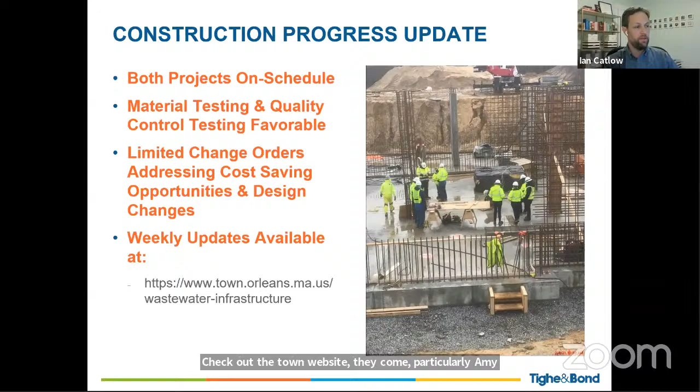One more update to add to the list that Lynn presented at the outset of the meeting: if you want to learn anything about the project, or why it's taken you longer to get to Friends Market or somewhere else in town, check out the town website. AECOM, particularly Amy, has been doing a fantastic job keeping that updated with traffic information and where work is ongoing.

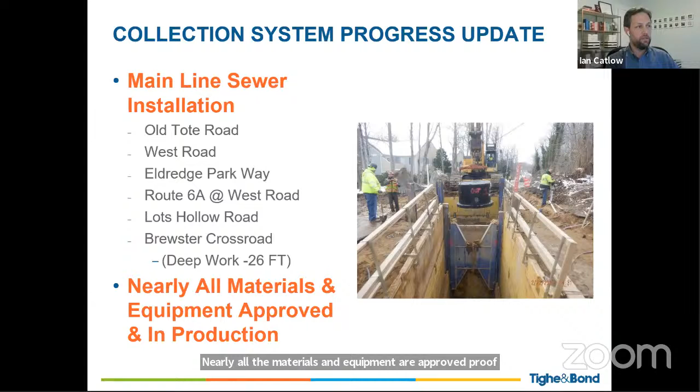Briefly, in terms of collection system progress, mainline sewer installation is complete on Old Tote, West Road, and Eldredge Park. A fair amount of work is done on 6A at this point, Lots Hollow, and Brewster Cross Road. In fact, Brewster Cross Road is the deepest sewer on the project, just about 26 feet below grade. So we're making good progress on some of the harder parts of the collection system project. Nearly all the materials and equipment are approved at this point and in production, and things are going really smoothly there.

Flipping over to the wastewater treatment facility site, the gentlemen in the figure here are wrapping up some floor finishing work in the lower level of the treatment facility. You can get a sense by looking at these guys and the height of the walls and columns set in place just how big the facility is. It's coming along quite well at this point. The base slab is complete, and all the foundation walls and columns are in progress. In the next few weeks, Daniel O'Connell and Sons is going to be preparing elevated slab portions of the concrete work, which you could imagine as a ceiling over these gentlemen working in the lower level.

There's a substantial amount of contractor proposed equipment under review through the shop drawing process. While many materials have been approved and are being manufactured, AECOM and DOC are working hard to keep feeding the construction machine, if you will, by getting additional shop drawings reviewed and approved so they can get things on order. We're trying to keep a close eye on this particular issue, as we're all concerned about potential delays in shipping and procurement of certain items.

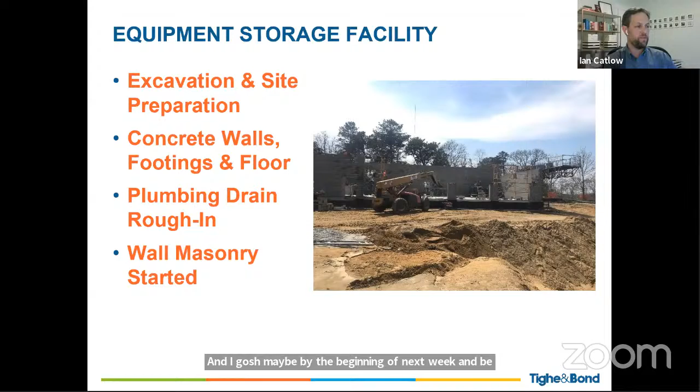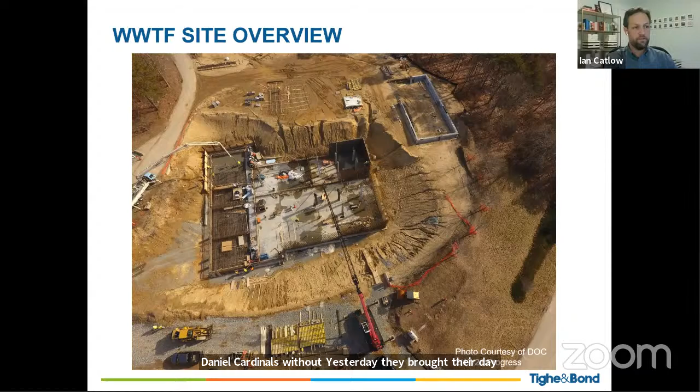They brought their drone and did another flight of the site, and this is what's happened in just over a month and a half. You can see the extent of walls that have gone up around the basement. There's some formwork here that they need to finish stripping. There are still some wall sections that need to go in, but they're moving right along. This is great progress.

Moving off the treatment plant site to the Wick well, this is the disposal location up near the water tower. The valve vault is essentially in place in terms of its base and walls. There's some piping going in and out of the vault, and the photo shows that the contractor has formed up so he can pour concrete for the roof of this structure. This isn't really on the critical path, but they've taken it on opportunistically, so when they have a spare moment they can come up and pour this concrete.

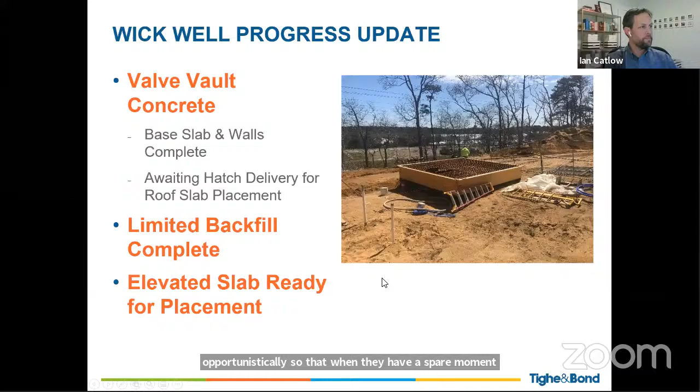Okay, so now the interesting stuff for FinCom - this is the cost update. So, two contracts. We initially started the wastewater treatment facility at $32,786,000. The cost has increased to $33,713,889. We've talked previously in other Board of Selectmen updates about why that's gone up - some of it, a lot of it, has to do with filed subbids that we added, and I'm not going to get into that now. I'm going to focus just on the two most recent change orders that I haven't discussed in prior updates.

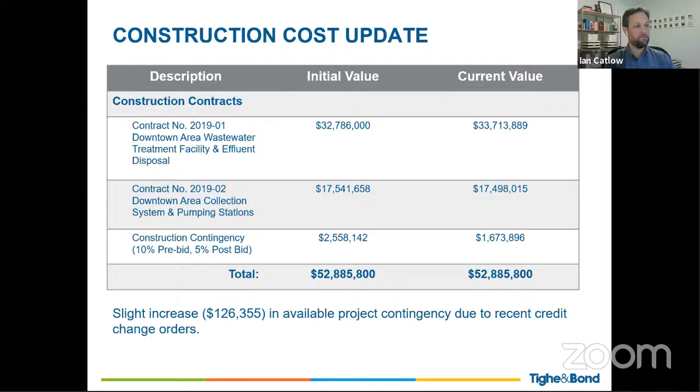Similarly, or actually differently, the collection system project started out at $17.541 million and change, and that's now down to $17,498,015. As you can see in the third line down here, we still have a fair amount of contingency - we started at 2.5 million, now we're down to just under 1.7 million. But I think we're all pretty comfortable that we can live within our means on this. There's been a slight increase in contingency since our last update to the board - we've captured about $126,000 in change, largely through a couple of value-oriented change orders.

So a little bit more on those. At the treatment plant, since our last update, we've executed change order 3. This changed the way pipes go through the walls - we switched from wall pipes, which go all the way through the wall and extend further, to wall castings, which can be installed entirely within the formwork. That saved the contractor time but yielded a similar quality product. We were able to capture a $30,000 plus change order there, so that was a credit to the contract.

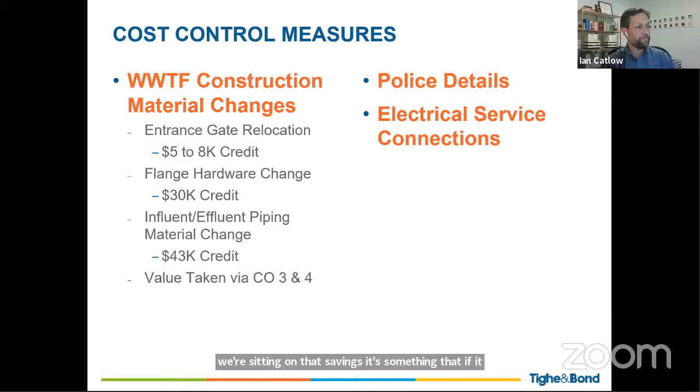And then we're almost to the end. Last slide I've got here is dealing with contract operations. I just want to get people attuned to what the schedule is primarily.

The draft RFP for this is actually no longer under review. It's out to bid as of yesterday. Bids are going to be opened on August 4th. The evaluation committee intends to review these bids by August 25th. And all of this is in anticipation of a select board warrant article vote on September 8th and a special town meeting to follow in October.

The whole point of this schedule is that it allows operators to be engaged in the last 6 months or so of construction so that they can get a good sense of equipment startup and see how the end of the building comes together, so that the people who are going to be running it know where everything is and how it works.

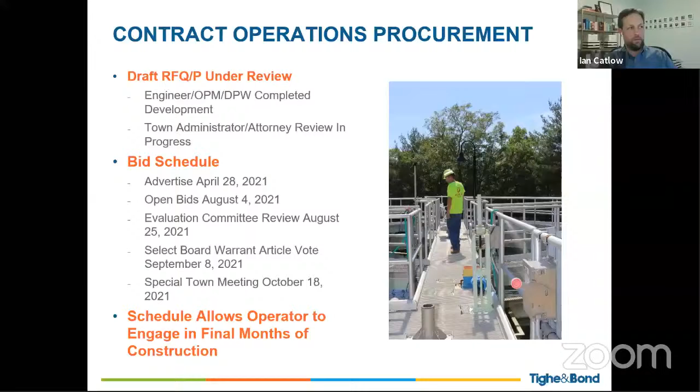So with that, any questions regarding the collection system or treatment facility that Tom or I could answer?

I think we're good, Ian. Thank you for that update. Excellent, again Tom's part might trigger more, but that was very helpful. Okay guys, thank you, see you.

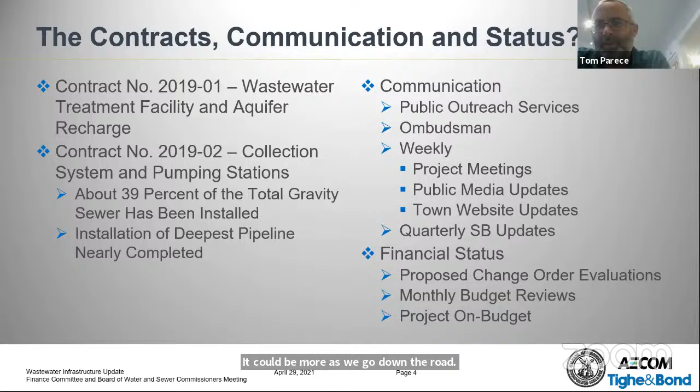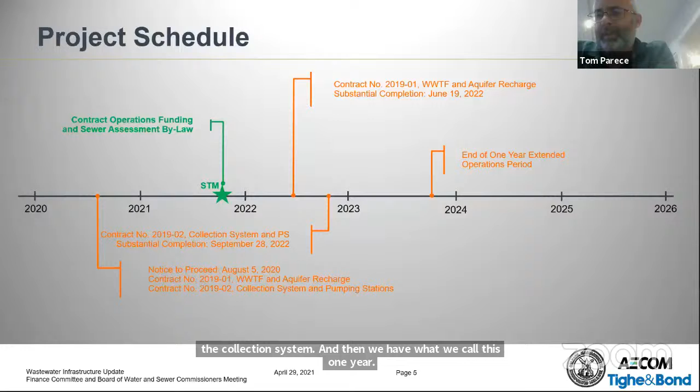Just to give everyone a quick overview of where we are with the schedule: back in August of last year is when we did the notice to proceed. The contract operations shown here in green reflect that at the special town meeting in October, funding will hopefully be approved. Somewhere around the middle of June 2022 is when the treatment facility will be substantially complete. A few months later is the substantial completion for the collection system. Then we have a one-year extended operations period where both the OPM and AECOM are available to assist the town and operators in running the facility, finishing punch list items, warranty issues, and so on.

I have a couple of slides later with combined schedules so you can see how things overlap, particularly between SRF, the downtown area, and Meeting House Pond.

Hey Tom, yes, just Lynn briefly — could you clarify when people will actually begin to use the system?

The main thing is the substantial completion of the treatment facility — that needs to be up and ready to accept wastewater. The collection system is in what I'll call 3 tributary or collection areas, one for each pumping station. Pump Station 1's tributary area covers Old Colony, West Street, Potonumecot, Route 6A, etc., and all flows to a pumping station at the intersection of West and Old Colony.

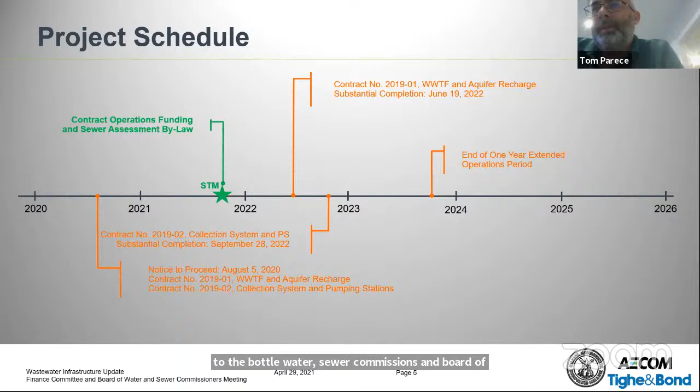So all that pipeline is substantially complete right now. They've been doing some testing and videoing of it. We anticipate that once the treatment plant is substantially complete, we can start to issue permits through the Board of Water and Sewer Commissioners and Board of Health for abutting properties to begin tying in — including some of the downtown area.

The project was scheduled to do tributary area 1 first, followed by 2, then 3. Area 2 includes the Snow Library Pump Station and the rest of the downtown businesses, which would likely follow around the spring of 2023. Ultimately Pump Station 3, at the Cranberry Plaza or Stop and Shop Plaza, would be last. We're hoping to phase it so not everyone has to hook in at the same time.

Thank you. You're welcome.

Kind of an overview: on the left-hand side is where the wastewater treatment facility is located, at the old Tri-Town septic treatment facility site. All the way to the right is Pump Station 3 at the Stop and Shop or Cranberry Plaza. Lower right is Pump Station 2 at Snow Library. Pump Station 1 is again at Old Colony and West. And lower left is the effluent disposal at Lots Hollow near the water tower.

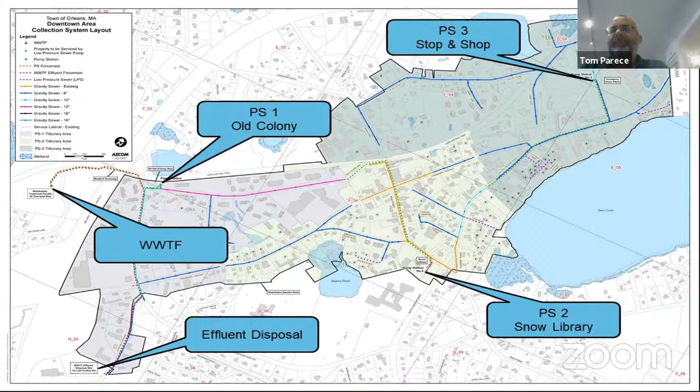I won't bore everyone with all of these, but this gives an overview of the extent of the work: some 32,000 feet of gravity sewer, 11,000 feet of force main, and a couple thousand feet of low pressure main. The piping going under Route 6 will likely occur after Memorial Day this year — we're in the midst of working out those details with the town and MassDOT, possibly after Columbus Day as well.

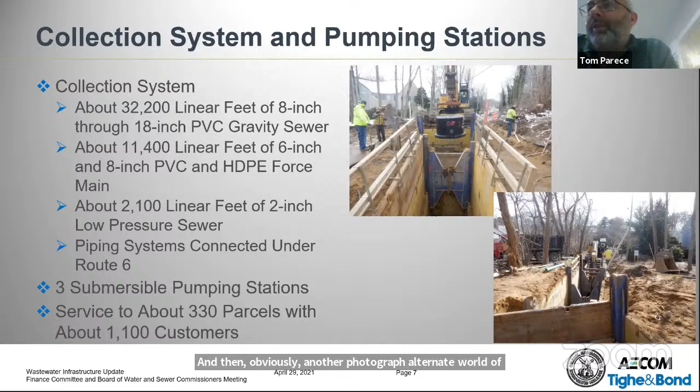Again, 3 pumping stations as we talked about, and some 330 parcels and 1,100 customers. And as Ian said, this similar photograph on the upper left is of Brewster Crossroads — yes, that is the deepest manhole installed, though there are actually some pipes a little deeper that were installed at West Street. Another photograph of Old Tote Road shows how extensive this ongoing work is.

So with that, I'll stop in case there's any other questions relative to the wastewater treatment facility.

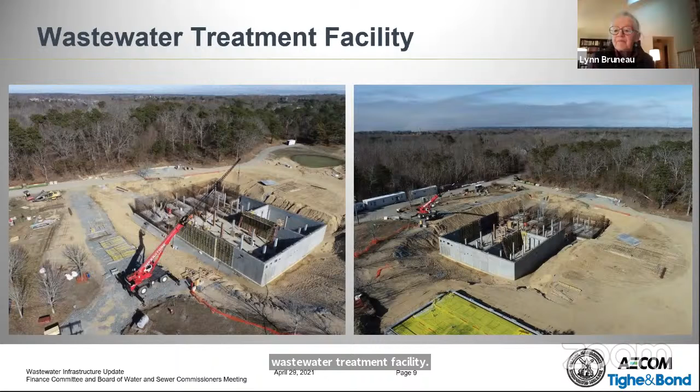I think we're good. Okay, great. So let's talk about Meeting House Pond and where things stand, giving an overview of the area.

We have a single pumping station for this area. Keep in mind that anyone on low pressure sewer will have their individual pumping units to pump up into that gravity system, but the pumping station is targeted to be on town hall property.

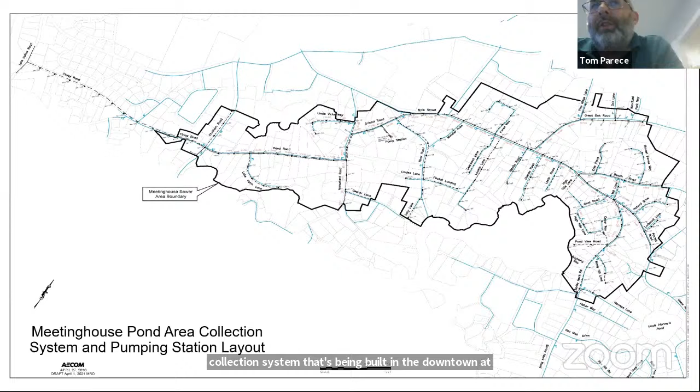We're working with the Conservation Commission to identify the final location based on a discussion we've had with the DPW about two weeks ago. That flow will then pump from the school to the pond over to Finley and ultimately discharge up into the collection system being built for the downtown at the intersection of Lots Hollow Road, then flow to the treatment plant from there.

Again, similar components as the downtown: 16,000 feet of gravity, 20,000 to 21,000 feet of low pressure, that single pumping station, 7,500 feet of force main, about 474 users. As I said, about half of them are going to end up on the low pressure systems.

We'll get into a little bit more detail on the next couple of slides on where we stand and how we're trying to minimize the number of low pressure pumps if possible.

We're currently in what we call the preliminary design phase, which consists of various components. One is topographic survey to look at the elevations, done through a combination of aerial survey, which has occurred, and then ground survey to pick up utility information, sills, and other items you can't get from aerial survey.

We're in the midst of the tail end of most of the subsurface borings. People have probably noticed a couple things out there—these very large white circles in place with numbers. We do those in white paint to identify where those soil borings are going.

Then DigSafe is called, and they come out and mark utility locations, whether it's gas, electric, et cetera, or the water department marks out the water lines. So it's kind of a two-phase process: we vacuum excavate the first 5 feet, and then drill down the rest of the way.

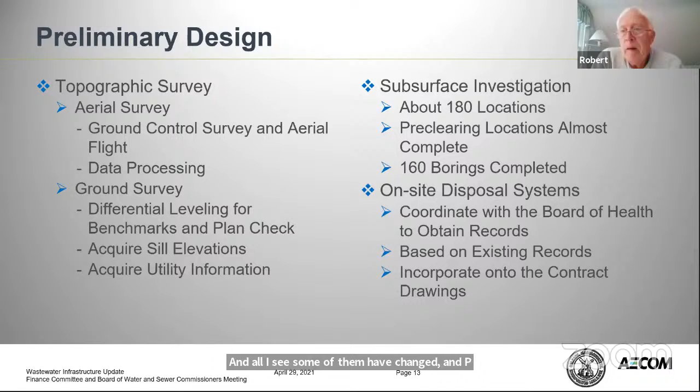Some of those locations changed, and people went out and got engineering firms to look at their locations to confirm it's the best option, particularly for some of the larger businesses or condo associations. There aren't as many of those in the Meeting House Pond area, but we're going to follow that same process.

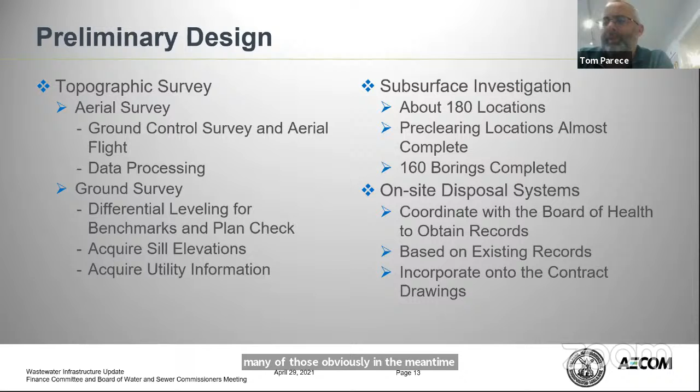The last couple of things relative to the preliminary design is what we call the cultural resource evaluation, similar to what we did for the downtown. For the most part it's paper research and a field survey, done in accordance with federal and Massachusetts historic rules and regulations. The intent is to identify any potentially sensitive areas of historical value that need to be protected. Similar to the downtown area, there were some areas with a high likelihood of sensitive areas, so we have a firm called PAL, the Public Archaeology Laboratory out of Rhode Island.

When we're in some of these areas, we have an archaeological specialist standing by during excavations to make sure that if we uncover something, they can stop the work, record it, and determine if anything else needs to happen. We did that for two days in the downtown area and haven't found anything so far, but we'll do the same thing for the Meeting House Pond area.

On the right-hand side of the slide, the last couple of items are to update the preliminary system configuration. As part of our original work four or five years ago, we did some preliminary plans and profiles to identify how much would be low pressure versus gravity, and how we identify that hybrid system versus other technologies. We'll take this information to update those and the quantities associated with it. The intent is, if survey shows that a roadway could be gravity versus low pressure, to minimize the number of low pressure pumping systems.

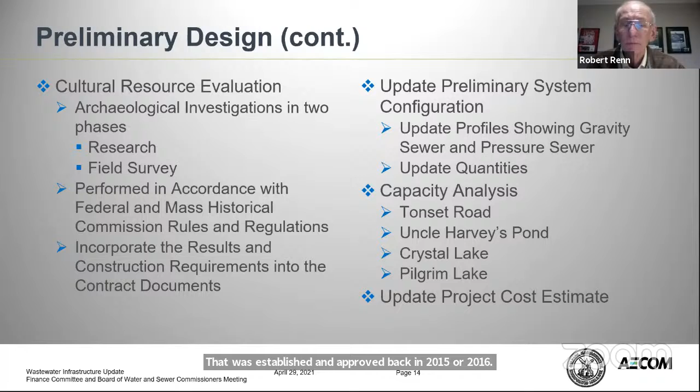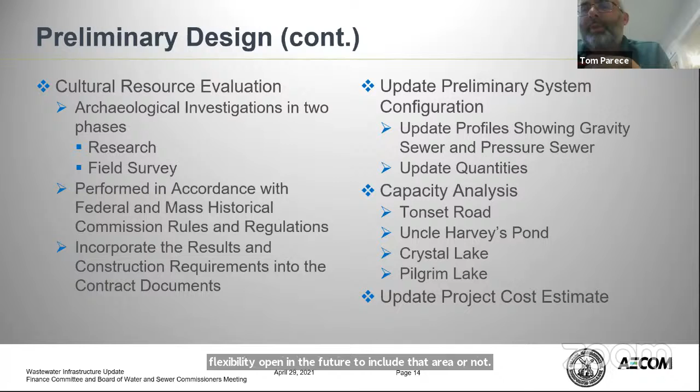That's correct. Yes, this will be able to tell us - if one of these locations comes into the system, we'll be able to give you an order of magnitude to say it's going to increase the cost of the project by X dollars. And the town will have to make that decision to say, yep, we want to go forward with that because we want to keep the flexibility open in the future to include that area or not. But that will have to be a decision made at some point by the town. Thank you. You're welcome, Bob.

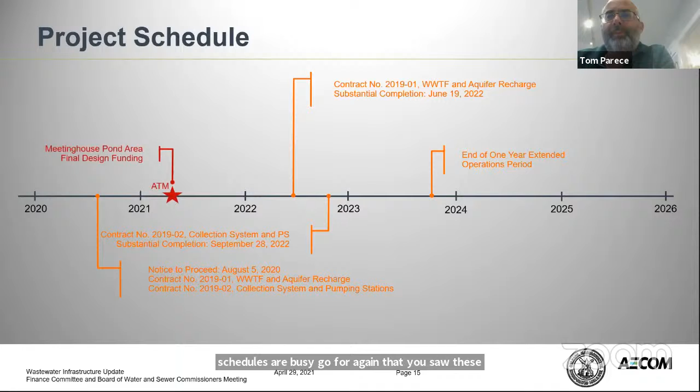And then, as I mentioned, there's a couple of other schedules as we go forward. Again, you saw these similar orange ones for the downtown area, but I'll flip through some of the Meeting House Pond ones. So at this annual town meeting, May 22nd, is for the final design funding. There's a slide later on to give you more detail on that.

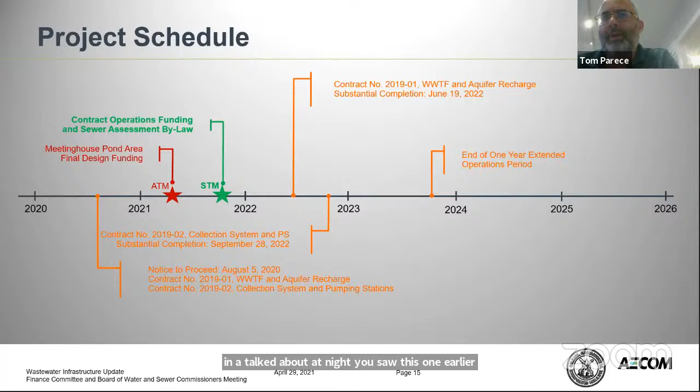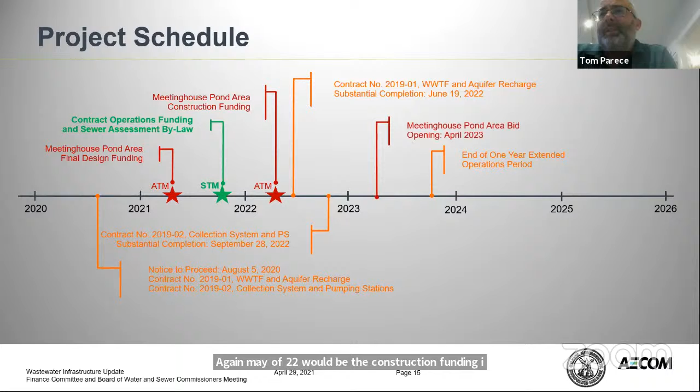Ian had talked about it, and you saw this one earlier. Again, the contract operations funding would be at the special town meeting in about the middle of October. May of '22 would be the construction funding I mentioned for the Meetinghouse Pond. And somewhere around April-ish of 2023 is when we'd be out to bid and opening bids for the Meetinghouse Pond area, with within a couple of months getting the notice to proceed. Somewhere around September-ish of 2025 is where substantial completion would hit for Meetinghouse Pond.

I'd also anticipate we'd probably phase the Meetinghouse Pond areas so we wouldn't have to wait for all of the connections, or all the pipelines, to be done in order for those connections to start to tie into it. And again, one of the last slides incorporates the SRF program and how critical that is to not miss some of those deadlines. Dick referenced that earlier in the presentation.

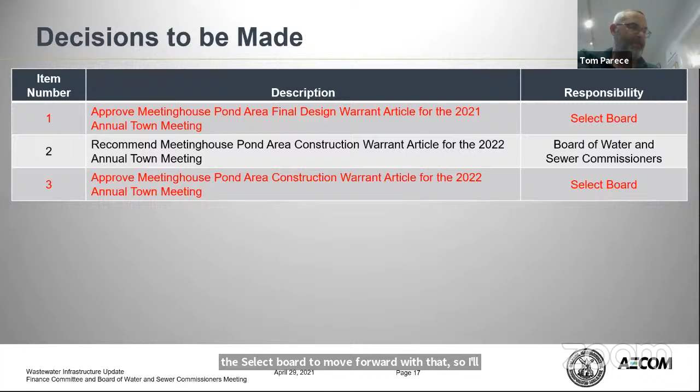So now the select board will do theirs once they get all their meetings done. Moving forward, looking a year from now, the Board of Water and Sewer Commissioners will review and approve an article for the construction funding, at $32 million plus or minus. Then ultimately it goes to the Finance Committee and the Select Board to move forward with that. I'll pause, Lynn, in case there are any other questions on Meetinghouse Pond.

I'll catch people up on permeable reactive barriers. And I couldn't get my thing unmuted in time. I do have a quick question for him.

Tom, going back to a question Bob Wren asked about the alternate areas that may be considered, is there money in that Meetinghouse design thing to consider implications of those areas, or are they strictly out in left field with nothing involved in them at all? No, there was no money at all in the articles, either the design or the construction article, for anything outside the geographic area.

Okay, one other quick question. You would be looking at what properties would be involved and what costs would be involved if you were to undergo that study, but you would also get an idea of the flows generated relative to what capacity the plant could have to absorb more capacity. I assume if those studies were decided to be done, that you would be doing that work also. That is correct. Thank you. You're welcome.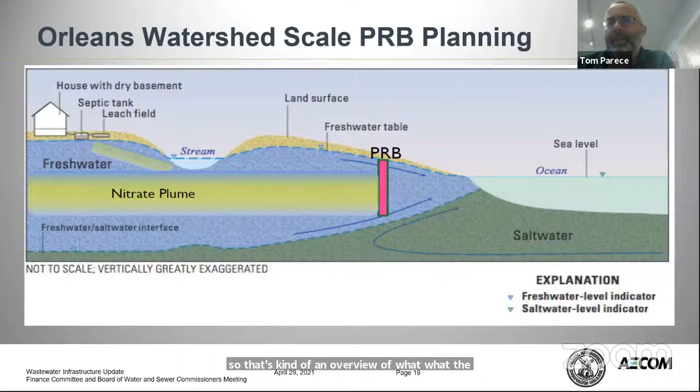Over the last couple of years, we've been doing the pilot study at Eldridge Park. We're in the last couple of sampling modes this year, although there was funding appropriated at the last special town meeting to do some additional analysis, more simplified, specifically looking to see when this emulsified oil expires, gets used up. That's a very difficult thing to identify because it will vary site by site based on groundwater flow, amount of nitrogen you're trying to take out, etc.

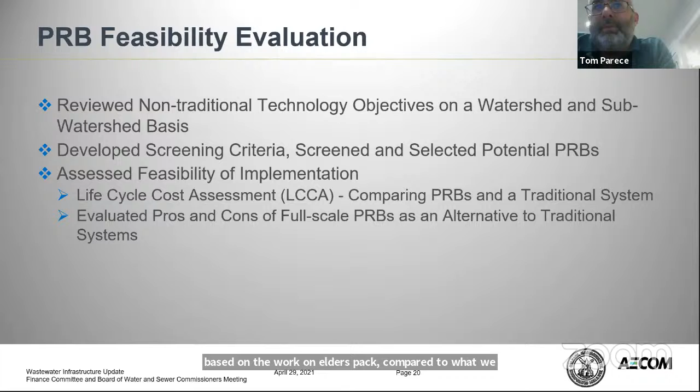But we want to get an idea of this, at least here at Eldridge Park, because it has a very high concentration of nitrate in the groundwater upstream of it, which will give us a good indication of what goes downstream and how long it will last. We reviewed all these locations on a watershed, sub-watershed basis, developed some screening criteria, did a life cycle cost assessment comparing these PRBs based on the work at Eldridge Park against what we call a traditional system—sewering, pump stations, etc.—and then looked at the pros and cons of both the non-traditional and traditional systems.

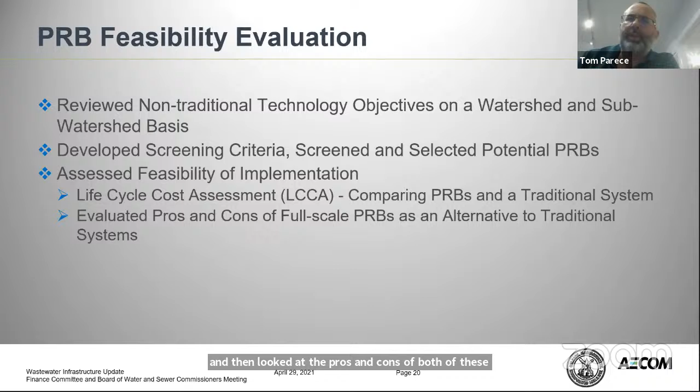We did some optimal dimensions of them, modeling the groundwater flow to define what we call the capture zone. We're like 40 feet down in the ground, about a 30-foot deep PRB. We don't catch all of the nitrogen in that whole water column, I guess I'll call it, but within that sweet spot is what we're aiming for, to remove a significant amount of it.

Again, we look at the upgradient and downgradient potential for what we call flux, the amount of nitrogen that's in there, and then we look at the efficiency of the PRBs compared to traditional ones. In this case, in Meetinghouse Pond, we're removing 100% of the nitrogen. No matter how good a PRB is, we can't guarantee you'd get 100% of the nitrogen out, and that's exactly why we're doing sewering of the Meetinghouse Pond area.

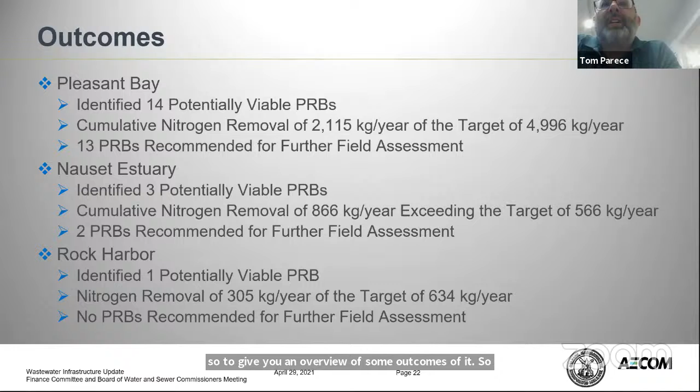So to give you an overview of some outcomes, we've broken it down by the 3 watersheds. Pleasant Bay, we identified some 14 potential viable PRBs. We show that they can remove some 2,100 kilograms of nitrogen, but that whole area has a target of some 5,000. We've recommended another 13 to go forward with assessment.

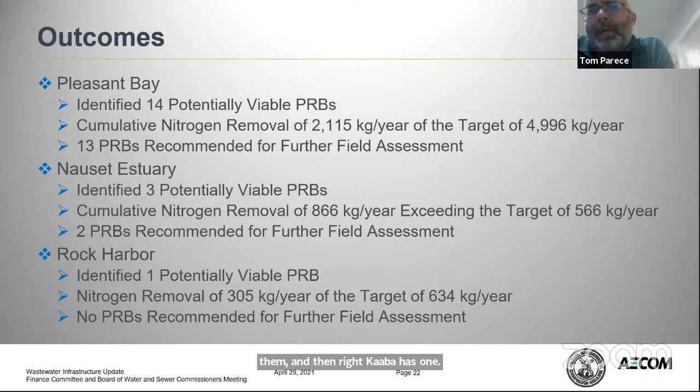Nauset Estuary, 3 viable locations. Those actually remove 866 kilograms a year, which exceeds the target of some 566, and again we're moving forward with 2 of them. Then Rock Harbor has 1, only gets about half of the targeted nitrogen out, so we're not proposing to go forward with that.

Back in last June-ish, I think it was August, we had multiple meetings with Mass DEP to look at PRBs and to see how viable they would be and how they could get permitted. It was a favorable meeting. I would say the one thing which is very typical is they want us to look at it on a case-by-case basis, and that's exactly what we're in the midst of doing now.

You'll see a couple of figures here in a second of this next phase of trying to refine some of the information. So again, we've phased it out. You've probably seen it in the capital plan over the next 12 years or so, starting to say, hey, if we decide to put a PRB in, here's roughly what the cost would be. We've talked about the number of monitoring wells upstream and downstream. We're trying to locate them in right-of-ways so we don't have to worry about private properties and backyards, et cetera. Again, adaptive management to make those adjustments.

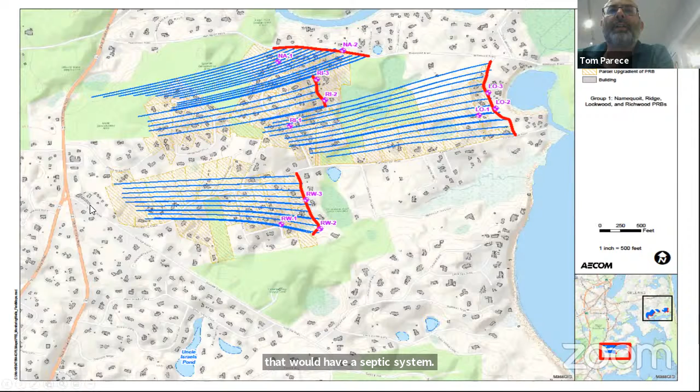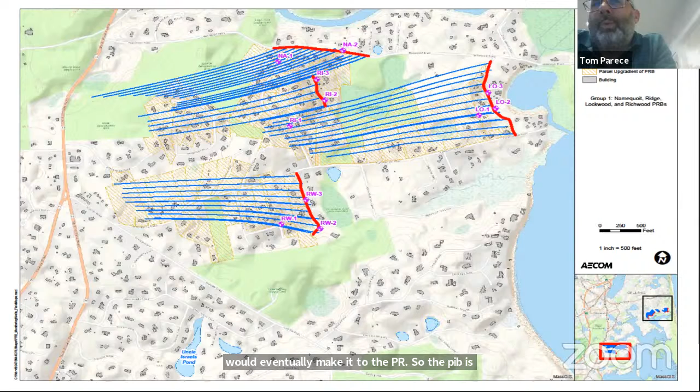So the next 2 slides show what we call the group 1 PRBs and the group 2 PRBs. A little bit of background here: the orange hash properties are the ones that, based on modeling and the depth of the PRB, show where the groundwater would be flowing from. So anyone with a septic system, for instance in this lot here, that flow would eventually make it to the PRB. The PRB is depicted in the red line, and the blue lines show the modeling of where that groundwater is coming from.

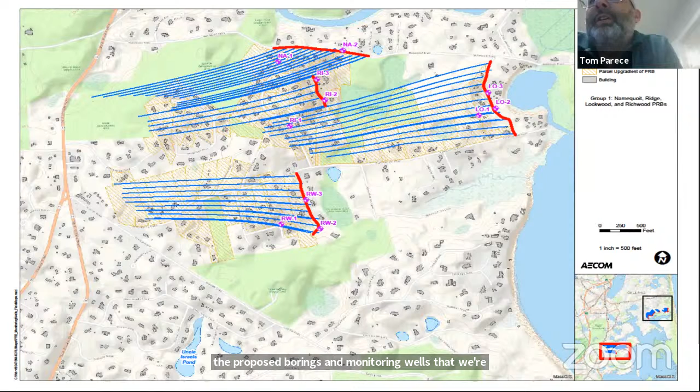And the purple circles or bullseyes you see here are the proposed borings and monitoring wells we're going to be installing over the next few months at these locations. We're out to proposal to 4 or 5 different boring firms, or subsurface firms, to get pricing.

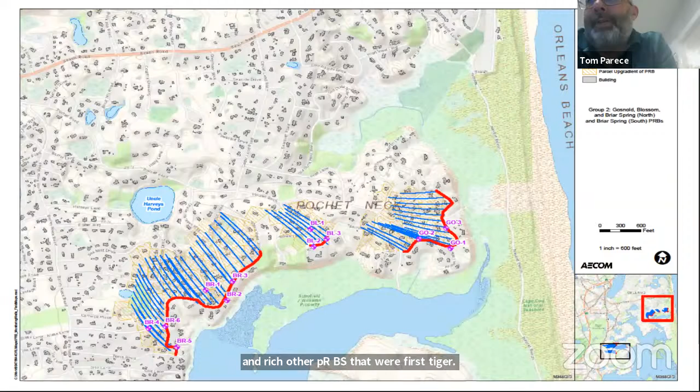We're hopeful that if the pricing is favorable based on the town meeting approval they gave us back in October at the special town meeting, we'll be able to get into group 2. These four here, Richwood, Lockwood, Namequoit, and Ridge, are the PRBs we're first targeting. We think those have high likelihood of being very feasible, and a similar figure for the next group: Briar Springs, North and South Gosnold, and Blossom.

So what are the next steps for the PRBs? We're vetting these locations. We'll go out and do the borings to get the depth of groundwater confirmation, and sampling to determine the amount of nitrogen actually in those locations. We'll modify some of the assumptions we've made over the last couple of years, may have to tweak the locations of these PRBs, and then we'll get the public involved, including the town, and do regulatory coordination to determine if it really makes sense to move forward.

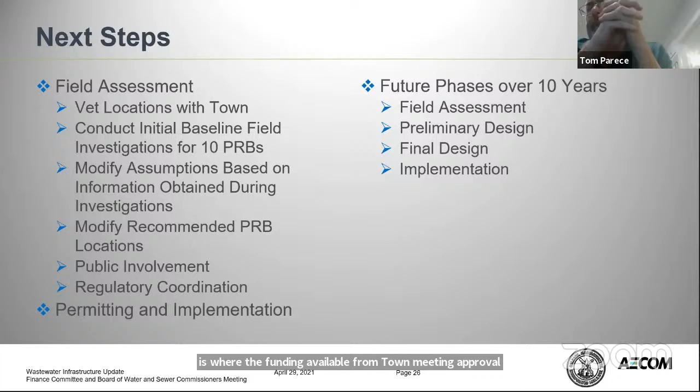One of the things we did when comparing these was a life cycle cost analysis to determine whether it really makes sense to put in a PRB versus traditional sewering, or vice versa. We did that based on a 30, 60, and 100-year life cycle cost analysis, and it varied from PRB to PRB. Some showed it was more cost effective to put a PRB in over 100 years, others showed sewering was better, and others flip-flopped depending on the location. As I mentioned earlier, over the next 10 years or so is where funding will be available from town meeting approval to do the field assessment, preliminary design, final design, and ultimately implementation of these PRBs.

So with that, I'll pause again and see if there are any other questions on the PRBs. I know it's a lot of information, but we continue to move forward with those.

Tom, would you remind us, in your discussions with Mass DEP and so on, where did it end up with regard to the potential for there being SRF funding for PRB strategies?

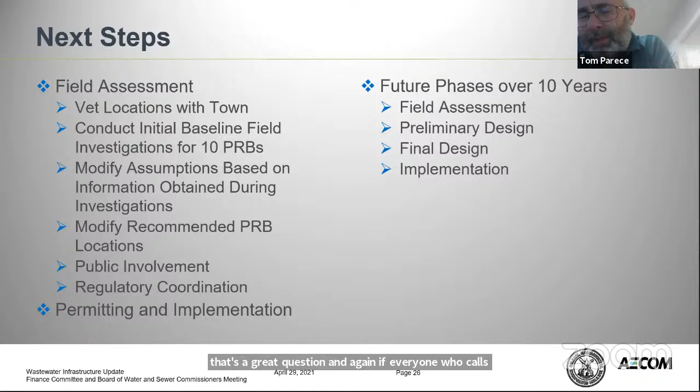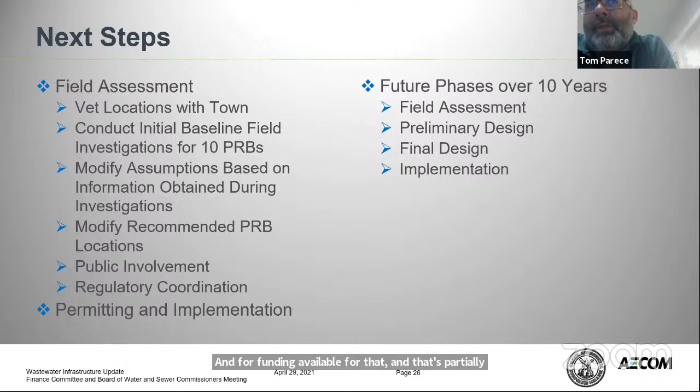Yeah, that's a great question, Lynn. If everyone recalls, we did the pilot testing for aquaculture over at Lonnie's Pond, and DEP basically indicated it would be very difficult for them to permit that and to have SRF funding available for it. That's partially because of some of the uncertainties or greater risks involved — you have X amount of oysters, and next thing you know a hurricane wipes it out and you've lost your nitrogen removal process.

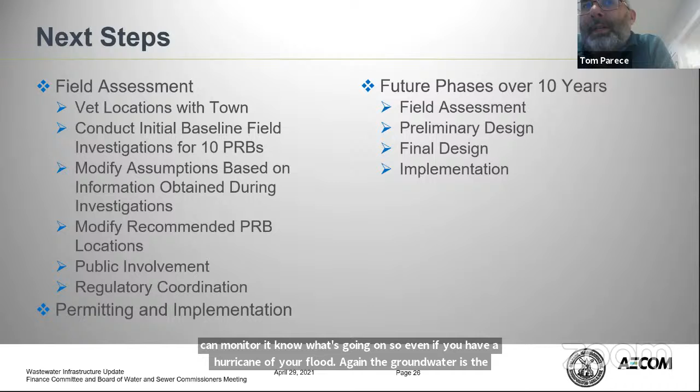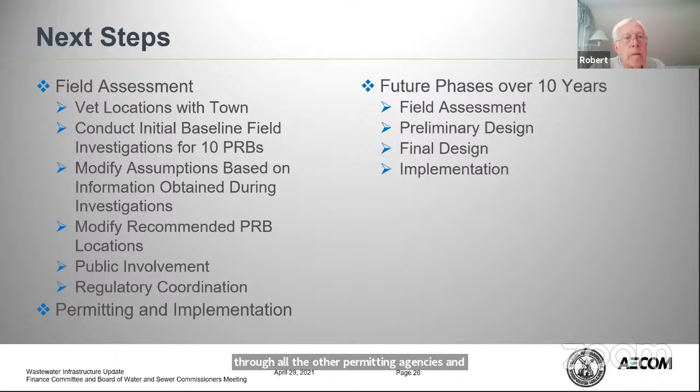Versus the PRB, which is a little bit more forgiving from that viewpoint — it's in the groundwater, we can monitor it and know what's going on. So even if you have a hurricane or a flood, the groundwater is the groundwater. It was all positive as far as Mass DEP, and also from MEPA, when we went through the notice of project change for the CWMP. Through that process they vetted it through all the other permitting agencies, and there were no major identifiable showstoppers as to why it would not be permitted, and therefore why it wouldn't be eligible for SRF funding.

So it's more neutral to positive as opposed to outright negative. That is correct. But who's on first? Who's got the ball? Right now it's with us. Matter of fact, I think a lot of Cape Cod and maybe other areas throughout New England are looking at these results, and I'll say they're probably waiting for Orleans to be successful in the first one and get it permitted to go forward. Okay, cool. Thank you. You're welcome.

Lynn, I have a question. Oh, Tim, go ahead please.

So in thinking about these PRBs, I'm curious — you've discussed the life cycle of them, saying that depending on how much nitrogen is flowing through these barriers and gets removed or tied up in the vegetable oil, they have a certain life. Can they be regenerated? Is this something you could do 3, 4, 5 cycles where you get three 30-year cycles by recharging them? And then a side question: we worry about things we're injecting into the groundwater, and this seems like we're really going to be pumping a lot of vegetable oil down there — is that something we've really verified shouldn't be of any concern?

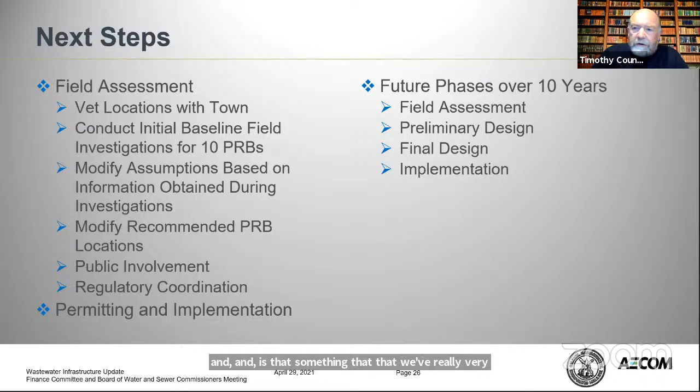Yes, when the life cycle cost analysis was done, it assumed, based on the work we did at Eldridge Parkway, that we would regenerate or re-inject the vegetable oil, I think every 15 years. You'd go back and see how much got used up, because monitoring wells are spaced so many feet downstream of the PRB, with the first one very close so we can tell breakthrough, when we start seeing nitrogen, indicating the vegetable oil has been used up. That's exactly how it was done, to go back and re-inject. It's not as difficult as the initial implementation, since that involved other monitoring wells, whereas this is all in the roadway or right of ways, much smaller diameter, and a relatively quick operation.

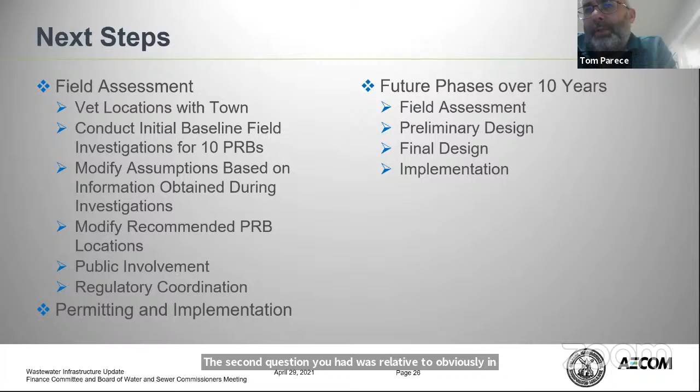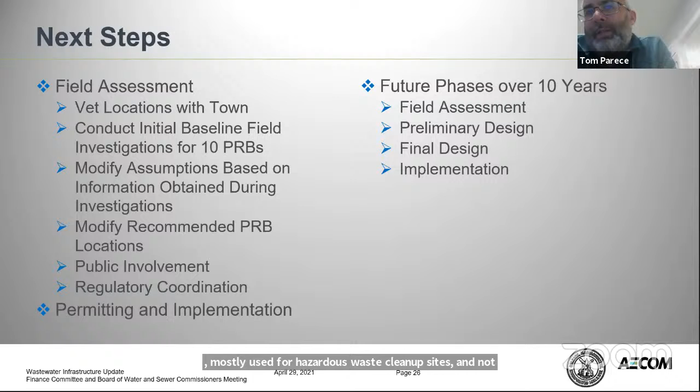The second question was relative to the vegetable oil being utilized. It's a food grade product, something Mass DEP permits, which is what we've done for the Eldridge Parkway PRB. We do the emulsification again, which makes it a little sticky so it adheres to the sand particles and forms that barrier. The nitrogen attacks the vegetable oil, which is the carbon source that ultimately gets used up. So there's no negatives identified. Again, the PRB process has been around for 40 years, mostly used for hazardous waste cleanup sites, but not well documented for nitrogen, which is why people are looking at Orleans to see how it gets permitted and the results.

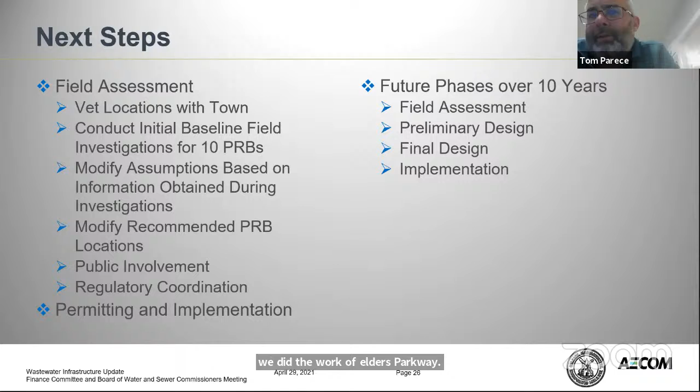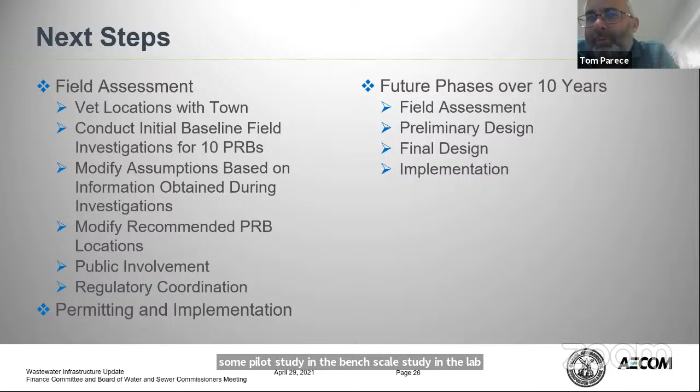But it's not moving downstream. It's not like the oil is drifting downstream - it does not move. When you inject it, it stays within 3 to 4 feet of where it's injected. That's part of the reason the vegetable oil emulsification was done. Before we did the work at Eldridge Parkway, the supplier did a lot of work, including a pilot study and bench scale study in the laboratory - they took sand from the Cape and ran it through columns to see whether there was any traveling downstream from where it was injected.

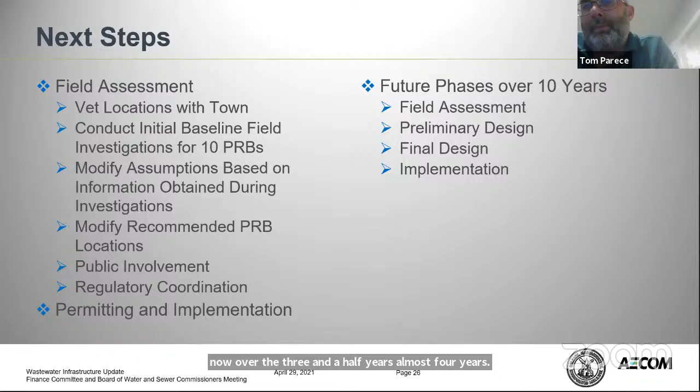That was one of the things we talked about to make sure we didn't have that as an issue, and that's the other reason for having that first monitoring well within about 10 feet of the PRB - so we could monitor it. At Eldridge Parkway now, over 3.5 years, almost 4 years, there's been no emulsified vegetable oil showing up in those monitoring wells 10 feet downstream of the PRB.

Okay, Tim? Thank you. You're welcome.

The last thing I want to talk about is some of the funding and financing, and everyone will have seen some of these slides before. I'm not going to go into all the details, but basically it covers the sewer assessment bylaw and the process for doing the betterments, et cetera.

Water usage has been updated, and we've developed some guidelines - those draft guidelines are on the web page, based on a uniform unit method. We're on a holding pattern right now for two reasons: one, it doesn't need to be decided now since the assessments won't happen for a couple years, and two, there's special legislation - the documents have gone into the state, but they haven't acted on it yet.

For the sewer calculation, we're going to use a 3-year average of water usage, base it on units, nothing less than 1, and the assessment won't be less than the total cost of the collection and pumping station. Keep in mind the treatment plant and the effluent or aquifer disposal is all in the tax rate - it's the collection system and pumping station costs that are on the betterments at this point.

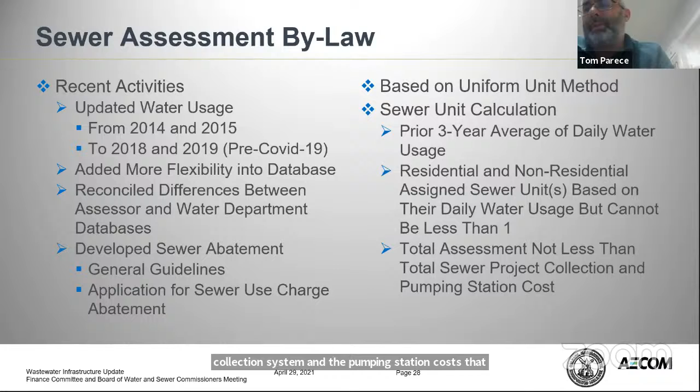There was other discussion relative to what to do with undeveloped properties, how to handle betterment payment options - whether someone pays it all up front or funds it over a 30-year period. There was also information developed relative to privilege fees for properties not abutting the sewers, and what happens if a property changes usage from a restaurant to a multifamily house or vice versa - that's in the process, again, compensatory privilege fees.

Property owners are responsible for all costs to connect on their own private property - that's from the building to the lateral being installed in the downtown area now. As mentioned, the special legislation went back in early February and is still within the state legislature to review and act upon.

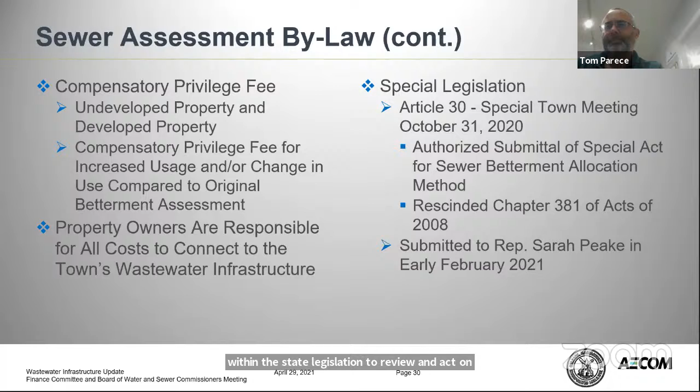As we know, back in the middle of April, the Cape Cod Islands Trust did award a grant of 25%, so that number is almost right on the nose of what we had projected. I give kudos to Alan McLennan because he did a lot of this work behind the scenes looking at these numbers. I'd say some of these other numbers are very conservative at this point.

The town continues to get money in from the hotel motel tax and short-term rentals, and we'll continue to track and accumulate that funding through the enterprise fund to help pay for it. Alan also indicated that the Biden infrastructure program is working through Washington, and there may be additional funding to help offset some of these other costs. We'll continue to track that and work to get grants as we go forward.

People probably remember the grant programs back in the 70s and early 80s or so, when there was a lot of grant money available — that's really all disappeared. So it's a big kudos to the state, and to the Cape and Islands municipalities down here, for creating the Cape Cod and Islands Water Protection Fund and ending up with these grants, especially at this percentage. Nowadays that just doesn't happen.

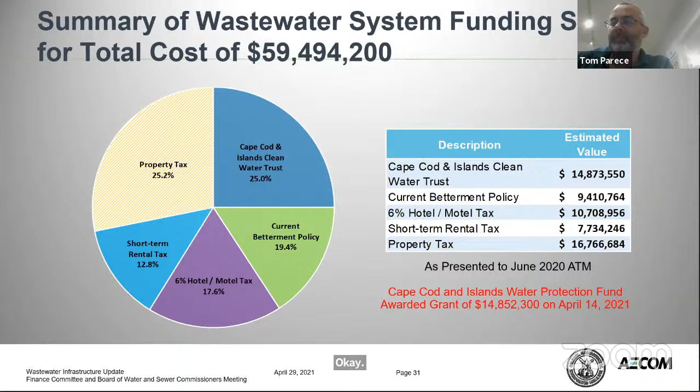What you don't see in here is anything relative to the decision we made on the PRBs. We have a presentation we're going to be presenting in about a month and a half. I'm waiting for some of the proposals we have out to verify costs for the drilling of the subsurface and the wells. Once we have that, we'll have a better handle on the schedule, the cost, and the extent of the areas we can do.

We'll be presenting that to the Board of Water Sewer Commission and to planning, to George Meserve. We can also make sure the finance committee is involved, at least to listen to the presentation when it occurs. Eventually that will also have to go to the select board. This presentation is going to be very similar to what we'll present to the select board on May 12th, leading up to town meeting and some of their warrant reviews and discussion.

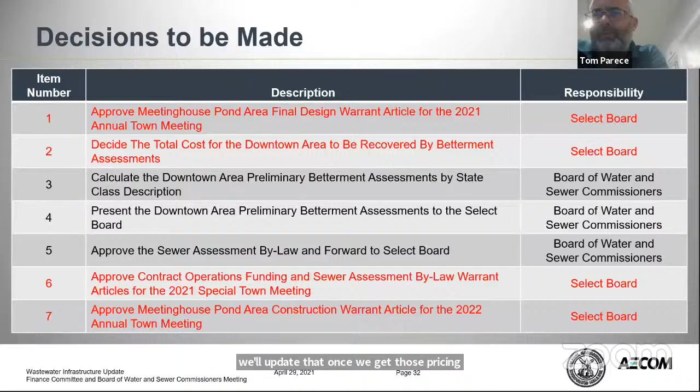And as I mentioned, the PRB is on here, but we'll update that once we get the pricing in and a schedule, and we'll be able to update a decision to be made relative to PRBs.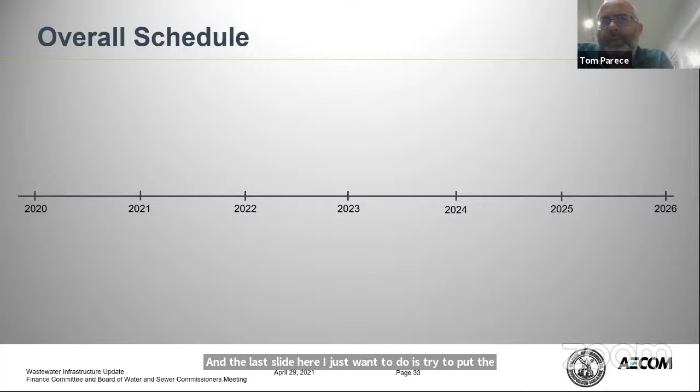The last slide here I just want to put the overall schedule together and look at some of the stuff we just talked about. There's a lot of information here, but I'll try to take it step by step. You've seen some of this on the previous slides.

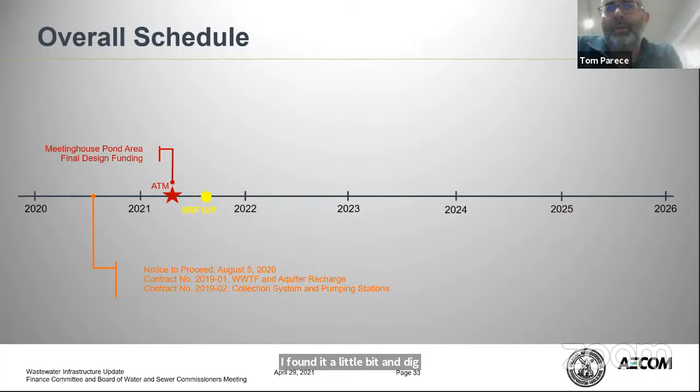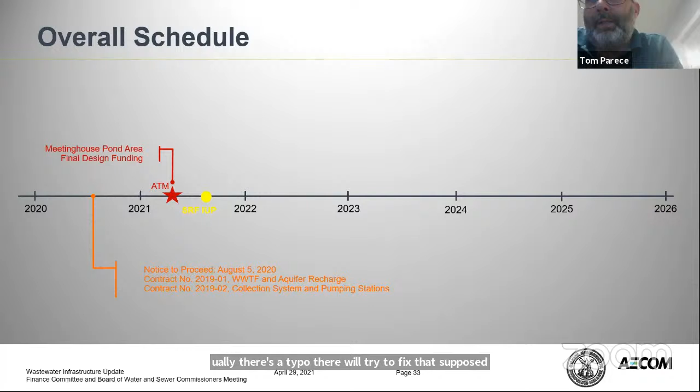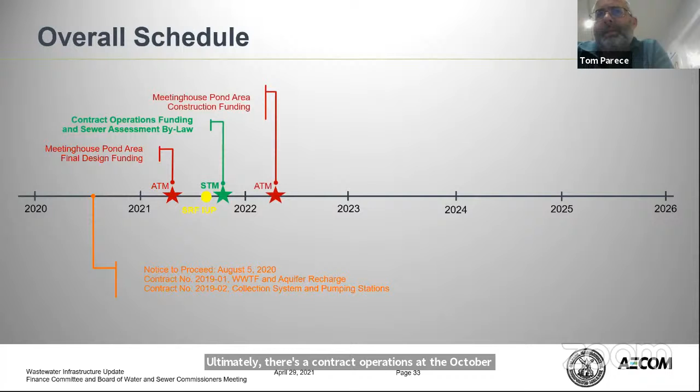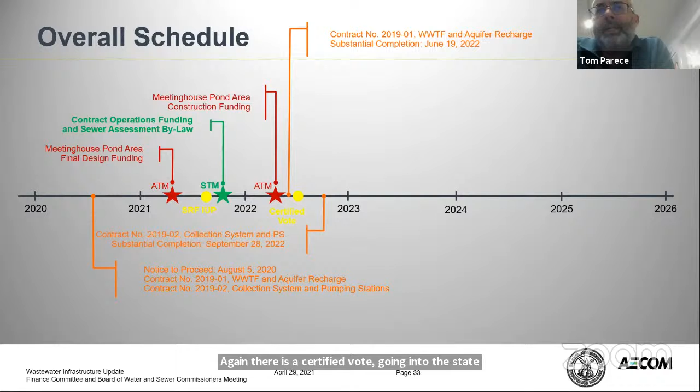Ultimately there's the contract operations at the October special town meeting, the May town meeting of next year for the construction funding. There's substantial completion in the middle of June for the treatment facility. There's a certified vote going into the state relative to that funding for construction for the Meetinghouse Pond, and substantial completion for the collection system in September of 2022.

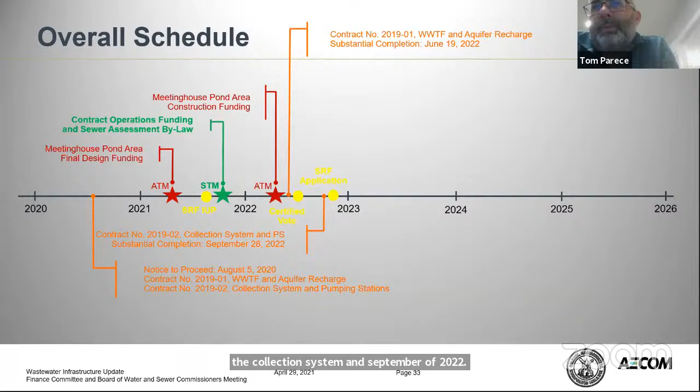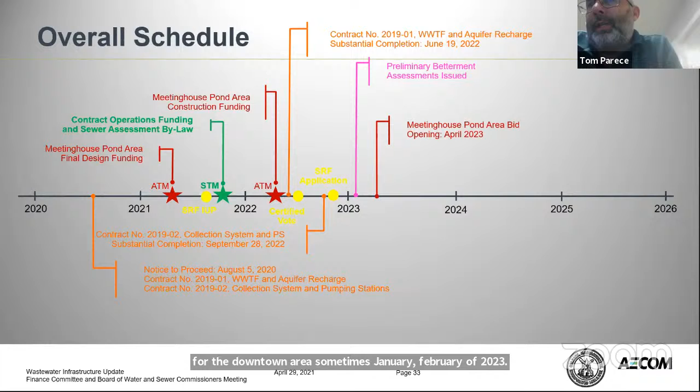There's also in October of '22 when the SRF application is submitted to the state. Preliminary betterment assessments are going to be issued for the downtown area sometime January, February of 2023. Hopefully the state approves the SRF applications and gives us permission to advertise, happening in April-ish.

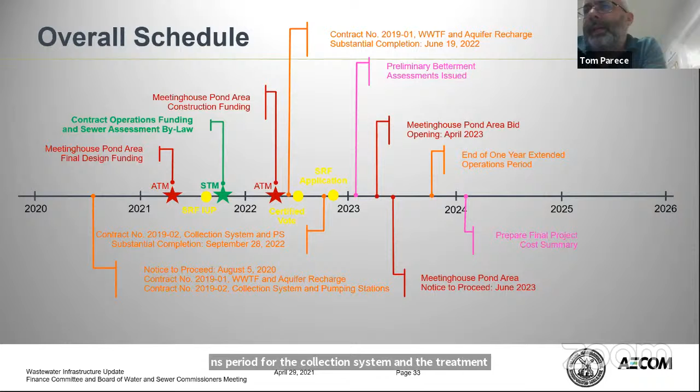A couple months later, the notice to proceed. There's the end of the one-year extended operations period for the collection system and the treatment facility. We prepare the final project cost summary for that downtown area project, and sometime in January, February of 2025 is where the betterments actually get assessed. So that gives you an overview of how some of these tie together.

I didn't dare add in the PRBs because there's so much information here now, but it would be a very similar process for the SRF program - you'd submit a PEF in August of that year, do the certified vote by June of the next year, the application, and then do the implementation as we go forward.

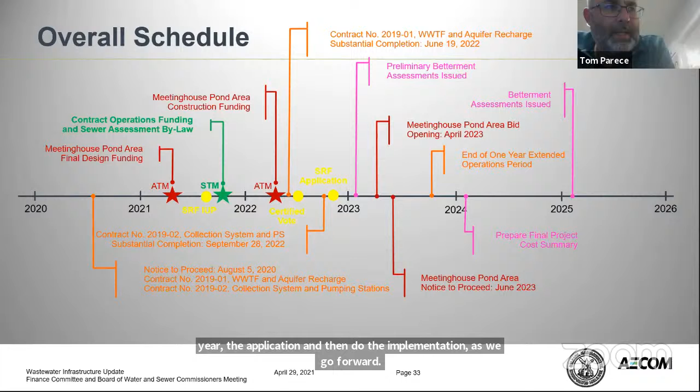So with that, Lynn, that's kind of the summary. I'll take more questions or get it back to Dick and Alan to see if they want to add anything. Any more questions, or as Tom suggests, we can go back to Dick and Alan for further commentary.

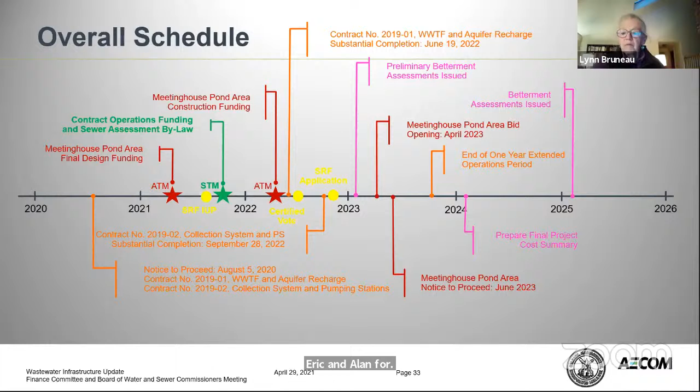I have one question. Tim, go ahead. So I'm thinking more about these PRBs - I assume the reason you're looking at them is because they're cost effective relative to doing sewering, and that's what you're going to determine as part of this process. Do you have any sense - are there areas of town that may be permanently on PRB, or are we just going to use PRBs as a temporary path towards sewering the entire town? Is there the potential that they could be overwhelmingly cost effective and be something we want to continue with going forward?

Yeah, that's a great question. One of the things we evaluated was looking at the proximity of these proposed PRBs relative to the downtown area and to the Meetinghouse Pond area. So for instance, Rock Harbor is a good example, or Tonset Road are the two that we looked at. Rock Harbor, it shows it's much more cost effective to put sewers in than to put a PRB there, and if you look at the proximity of it to the collection system, it makes sense.

Tonset was a very similar evaluation. There are other PRBs that are much further away from the downtown or the Meetinghouse Pond area, and it absolutely makes sense to look at PRBs for at least the short term, and in some cases probably even a long-term solution, because it's very costly to put the pipes in the ground, and that would have to increase the size of the facility.

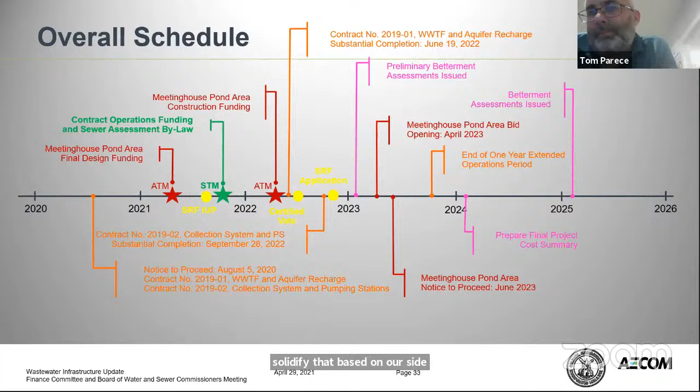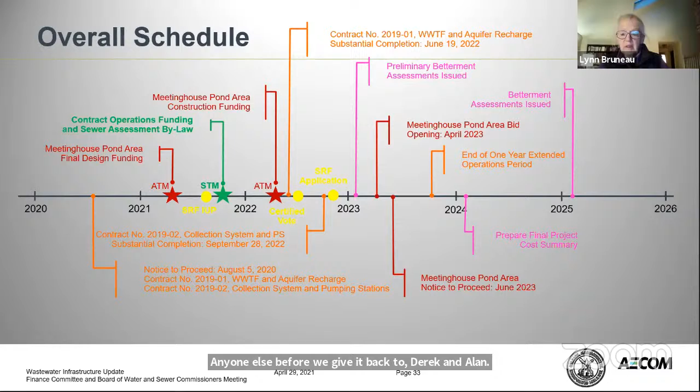Okay, Tim? Yes. Okay. Anyone else before we give it back to Dick and Alan? Cool, we can probably take the slides down. We're all still here. Well, I see, there we are.

So, Dick and Alan, should we just have 3 to 7 words about some of those topics we talked about a little earlier about who's on first and who's in charge?

Well, one of the things we talked about that didn't come up in this meeting, but we have discussed, as you've been, Lynn's been at all the meetings, and we've had some requests from different groups in town to do things, and we listened, but we're following a plan. We are executing a plan that the town approved, the town funded. There's lots of years of work that's gone into it. That's what we are executing now.

We did a tiny bit of, we're smart, but we're not that stubborn. So we did do a little bit of engineering and manipulating, which is very, very short money, to increase the size of some pipes in case some forward-looking engineering, in case those things did come on. It was a little bit of a change in the original plan, but it was short money. I mean, less than a down payment on the car, really, a couple thousand dollars to get some of this done.